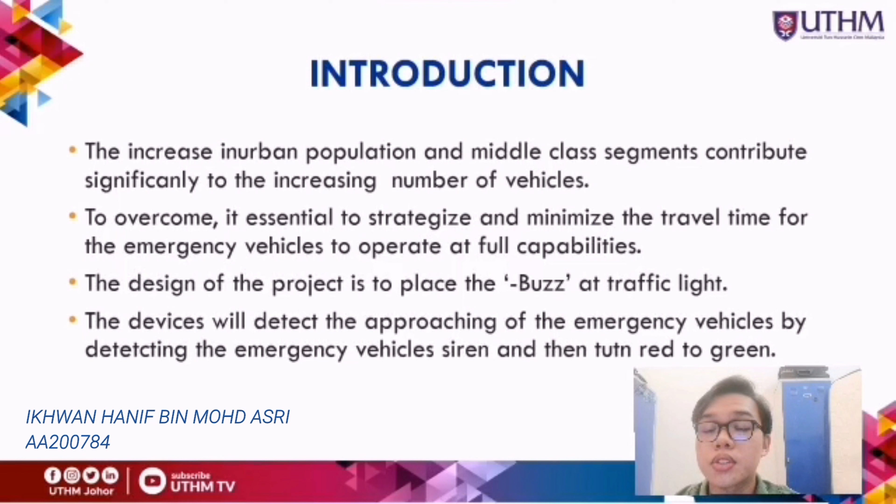Because of the increase in urban population, middle class segments contribute to the increasing number of vehicles. With the increasing number of vehicles, it is hard for emergency vehicles to get to the destination as early as possible.

So this project aims to overcome or reduce the travel time of emergency vehicles. The name of our project is called e-Buzz: Simulation Smart Sensing for Emergency Vehicle, and the objective of this device is to reduce the travel time.

The design of this e-Buzz will be placed at the mid-section pole of the traffic light. The device will detect the approaching emergency vehicle by detecting its siren, then it will change the red light to green light.

The objectives are: first, to design a device that efficiently detects the siren; second, to design a device that is easy to understand for road users; and finally, to develop a complete design of smart sensing for emergency vehicles using software.

The project scope is that we want to decide the design called e-Buzz: Simulation of Smart Sensing for Emergency Vehicle, as I mentioned in the introduction.

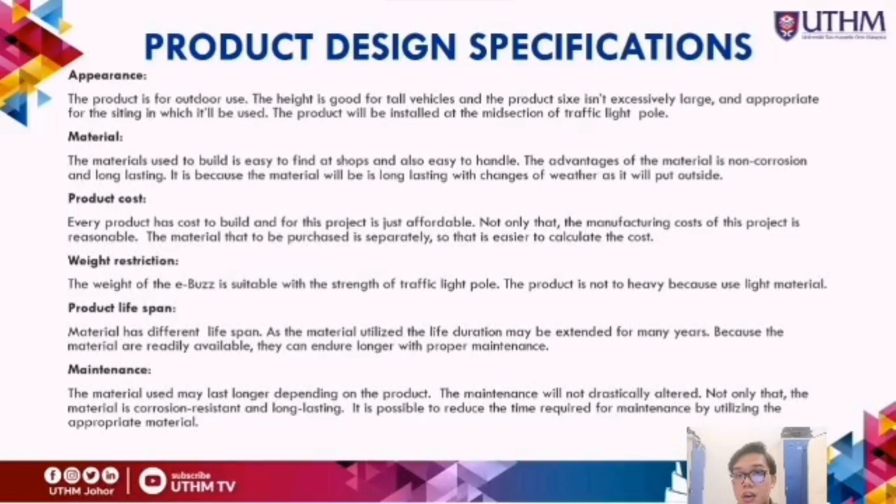Lastly, maintenance. The material used may last longer depending on the product, and the maintenance will not drastically alter. The material is corrosion-resistant and long-lasting, so it's possible to reduce the time required for maintenance by utilizing the appropriate material.

Now we go to product function. The e-Buzz will help reduce travel time for emergency vehicles. The siren of the emergency vehicle will be detected by a microphone sensor, then the sensor will transfer the frequency to the system, and the system will change the red light to a green light, allowing the emergency vehicle to easily get through.

Now we go to the design requirement and criteria. First, the requirement: it must be made out of material suitable to last long and non-corrosive. Second, product cost about RM 400. Third, the product can last for 15 years. Finally, it should be easy to maintain because the spare parts can be found easily at shops.

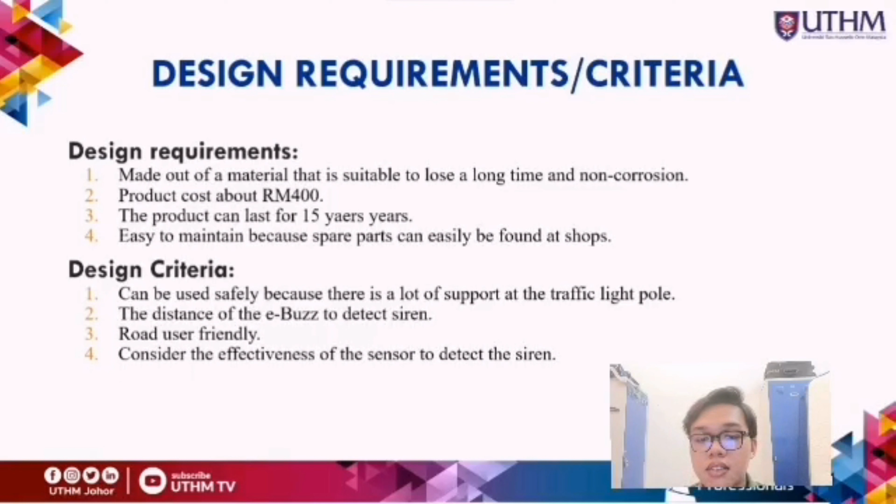Next, we go to the design criteria. It can be used safely because there is a lot of support at the traffic light pole. Second, the distance for the e-Buzz to detect the siren. Next is road user friendliness, and finally we consider the effectiveness of the sensor to detect the sirens.

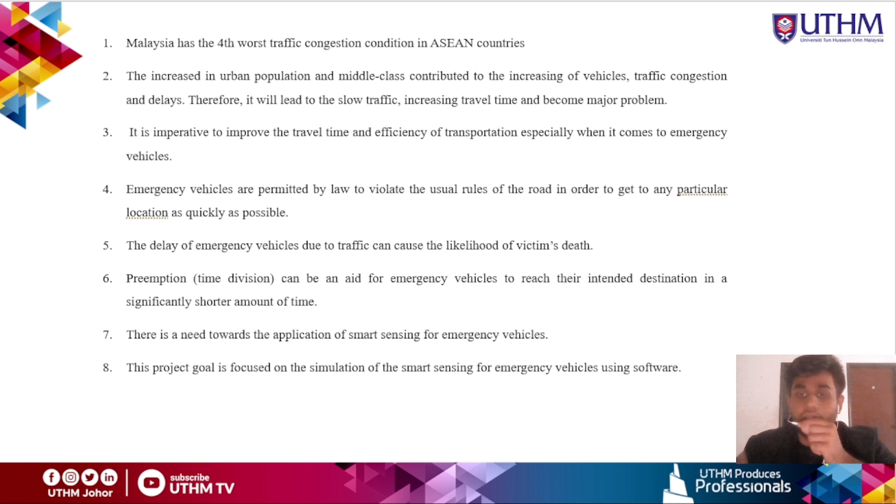This project's goal is focused on the simulation of smart sensing for emergency vehicles using software. Thus, the aim of the e-Buzz simulation of smart sensing for emergency vehicles is simply to ease the authorities responsible for reacting to emergencies, such as ambulance services, police, firefighters, and many others.

Every phase has its own subtopic to be discussed. Every phase is a vital step in product improvement, as it will assist us to visualize the steps in designing and help us perform this assignment with a terrific result.

The early level of this research phase method consists of layout and studies, knowing what we have, what we want, and the ways to get the required facts, from micro knowledge to apprehending the significance, using present information as a starting point. So by using analysis and synthesis methods and so on, we combine the vital influencing factors of the goods involved, so that we can manually carry out the layout in a focused manner. Thus, this is the research phase.

For the conceptual design stage, based on Cheng, from our reference, assessing the conceptual design stage means assessing a person's previous market needs and desires. This is what is called the conceptual design or conceptual layout stage. This takes the form of an ever-changing system after the above layout position is determined, from rough to fine, for example fuzzy to sharp, short to create layouts using specific procedures.

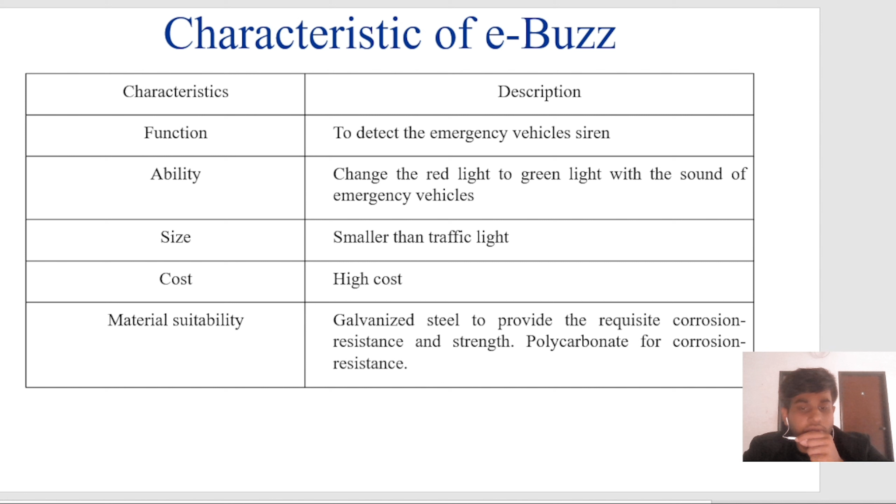Now I'll be explaining regarding chapter 4, which is the conceptual design. The design concept generation is the part where the idea generation occurs.

In this stage, we have to look at the problem from various aspects, and this will result in a concept that we may not have even come up with without some deep thinking. This is a crucial part of the product development process. Besides, we also discuss with each other as teammates to find out the suitable design and material.

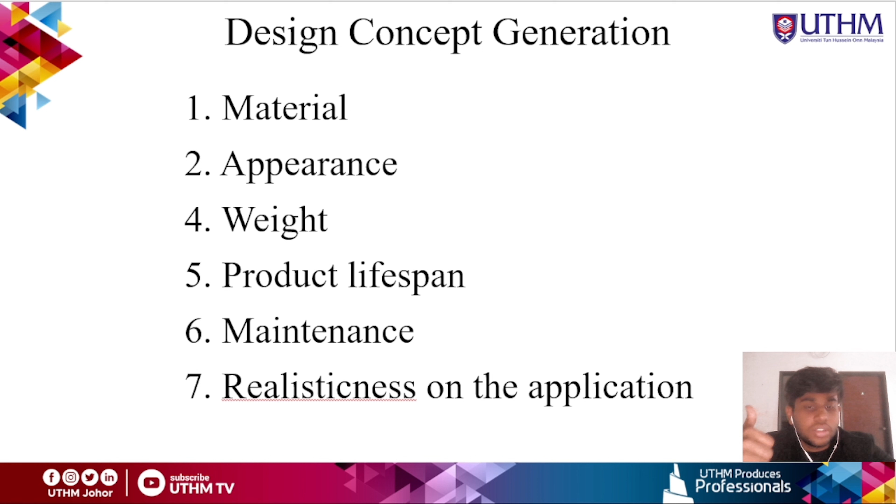From our discussion, we are able to identify several aspects: first, material; second, appearance; third, the weight; fourth, the product lifespan; fifth, the maintenance; sixth, the realisticness of the application.

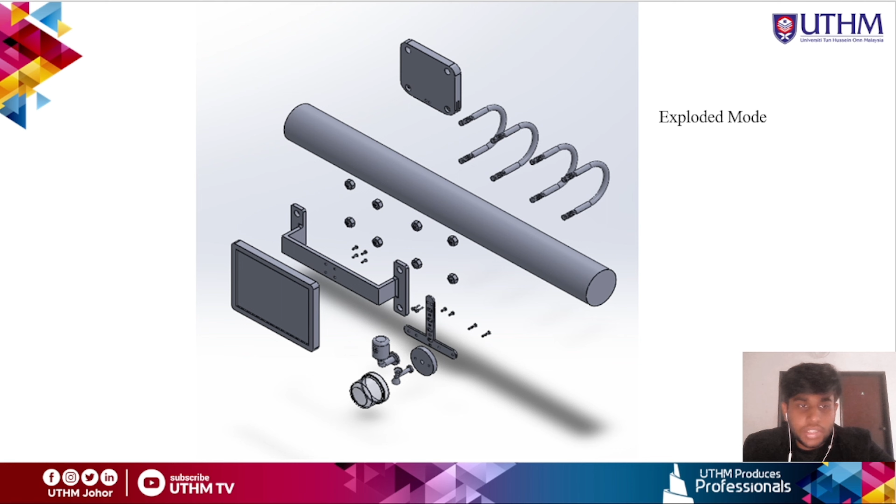This is the exploded view of the e-Buzz. In order to achieve all the requirements, the components of the e-Buzz have been produced, and each part serves different purposes. Each part has been determined by its function to create the prototype of the e-Buzz.

For the rotating part, it is to give the road user a notification or signal of an emergency. It has one quantity as well. As for the bracket, it is to connect and support the microphone sensor and the siren of the emergency part. It has one quantity as well.

As for the microphone sensor, which is the main component, it is to give a signal to the siren when it detects a trigger, basically triggering the whole device.

Then we have bolts of 20mm to connect components with another component. We have 4 bolts of 20mm size, and we have 6 bolts of 10mm size. This is to connect components with another part.

Then we have the mount, which is to complete the bracket with the mount hook, also one quantity. We can conclude that the conceptual design plays an important role in order to really brainstorm the design concept of the e-Buzz.

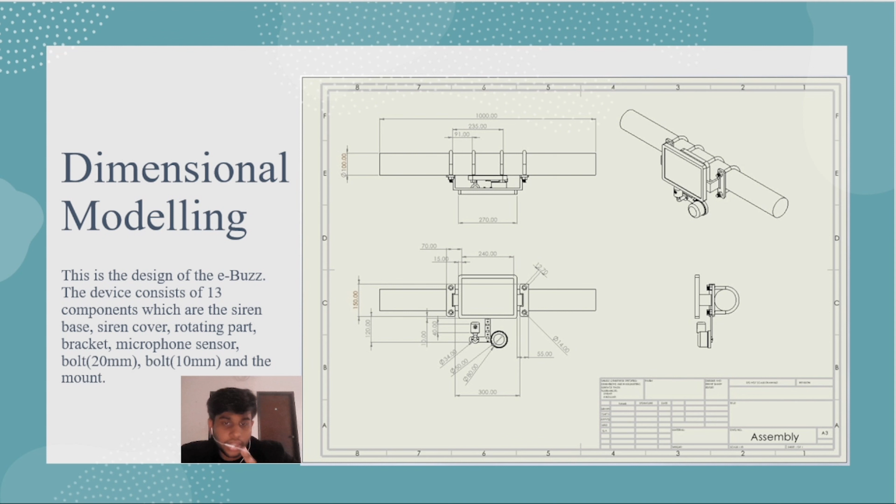For chapter 5, which is the embodiment design, this is the dimensional modeling of the e-Buzz. This design consists of 13 components: siren base, siren cover, rotating part, bracket, microphone sensor, bolt of 20mm and 10mm, and the mount. This is the whole dimension of the e-Buzz, detailed for each and every component and part, the sizing and the dimension.

Now for the calculation part, first we have to calculate the centroid. We use the formula: pi r square times 100 divided by pi r square. So pi, the radius is 100, pi times 100 square times 100 divided by pi times 100 square. Then we'll get...

100 for our centroid. Once we find our centroid, we have to calculate the moment of inertia. For the circle, we use the formula pi over 4 times 100 to the power of 4, plus pi over 4 times 200 squared times 100 squared. Then we plug in using a calculator, we'll get 392.7 times 10 to the power of 6 millimeter power 4.

Then we find the stress of compression by implementing the formula which is shown. We plug in 50 times 0.1 divided by the moment of inertia of circle, which is 392.7 times 10 to the power of 6. Then we'll get 1.27 times 10 to the power of negative 8 megapascal.

Then we find the stress for tensile. Using the same formula, we plug in 50 times 0.1 divided by 392.7 times 10 to the power of 6. Then we get 1.27 times 10 to the power of negative 8 megapascal.

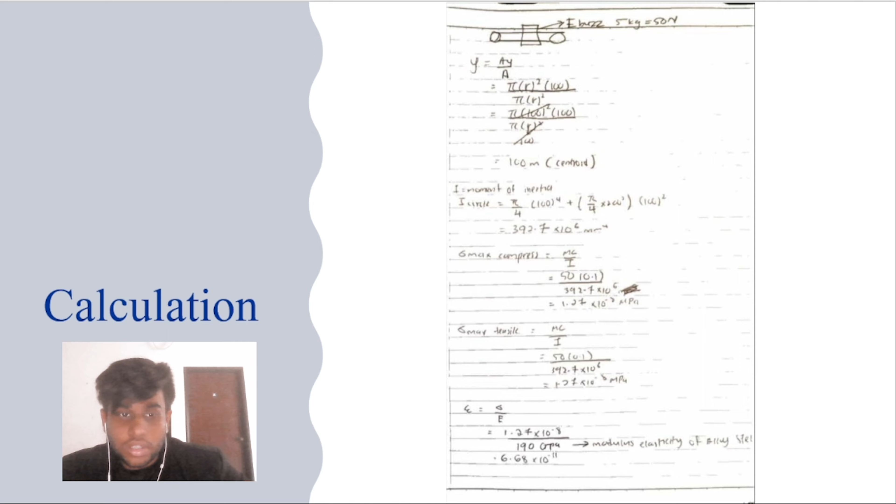Now, as for the material of the e-Buzz, all the selected materials will be utilized and have certain tasks and functions required to make a good product, so that the product can function well. To make the device operate well, we have to ensure the right choice of material so the objective of the project can be fulfilled. After discussion and research, we have determined the suitable material that qualifies to be used in our product in order for it to operate properly.

For the material we use high strength low alloy steel, because it maintains formability and weldability. High strength low alloy metals have excessive slip and corrosion resistance, but flow properties along with corrosion resistance and micro hardness can similarly be improved by manipulating the melt to form a premium dense grain layer on the floor.

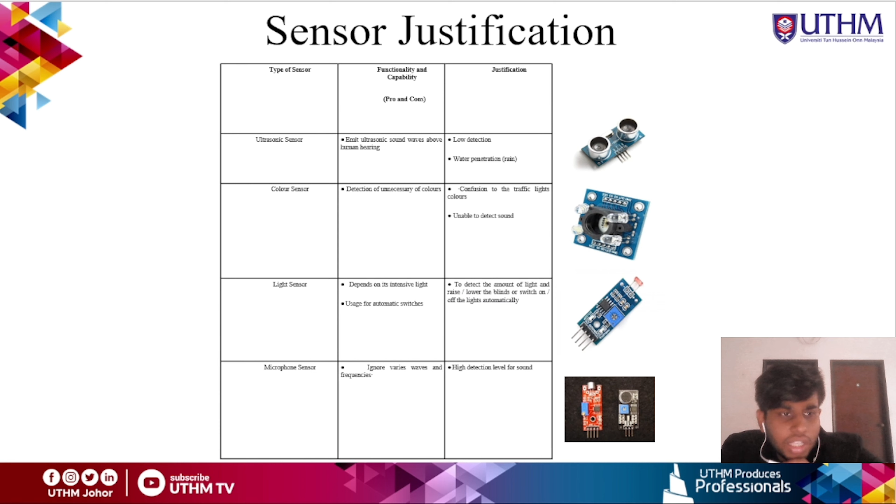Now for the light sensor, it depends on the intensiveness of light and uses automatic switches, detecting the amount of light to raise or lower blinds or switch lights on automatically. Now for the microphone sensor, it ignores various waves and frequencies. Why do we choose it? Because it has a high detection level for sound.

To put it short, the way the e-Buzz functions is divided into 2 ways: first, when the e-Buzz detects the approaching emergency vehicle with siren on, and second, without siren, as I have just explained. The process is simple.

All of the elements which I have mentioned are the critical differentiators between our goods and those presently on the market. Consider the product's likelihood of failure as well as the maximum performance that may be attained. We have worked really hard to ensure this product's design and production were error free, so no worries.

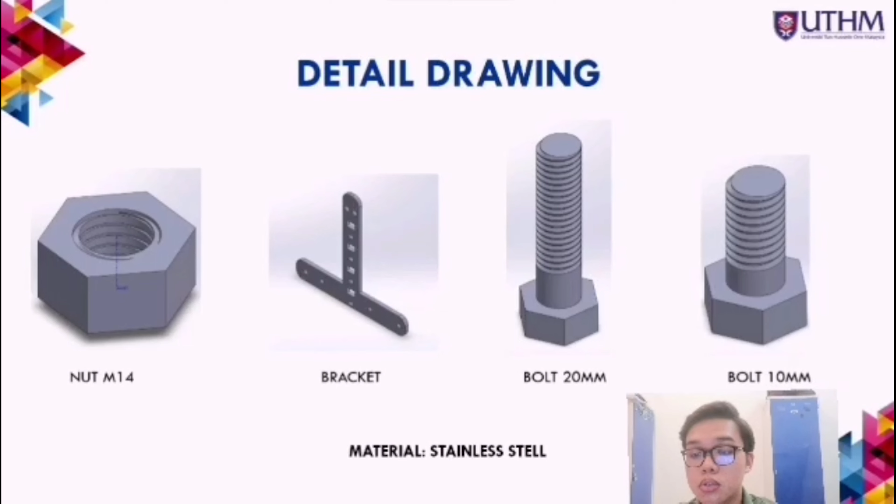Then for the detailed drawing, we will discuss the materials, made from stainless steel, such as nut M14, bracket, bolt 20mm, and bolt 10mm. This is because it is highly durable due to its corrosion resistance and durability.

Then we talk about the alloy steel used for parts such as the display screen mount, pole, and mount hook. This is because alloy steel has high tensile strength and easy compressibility.

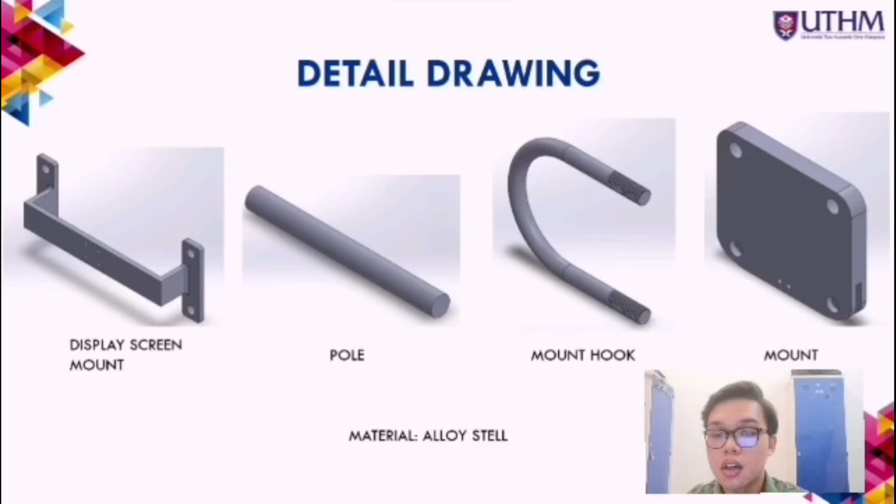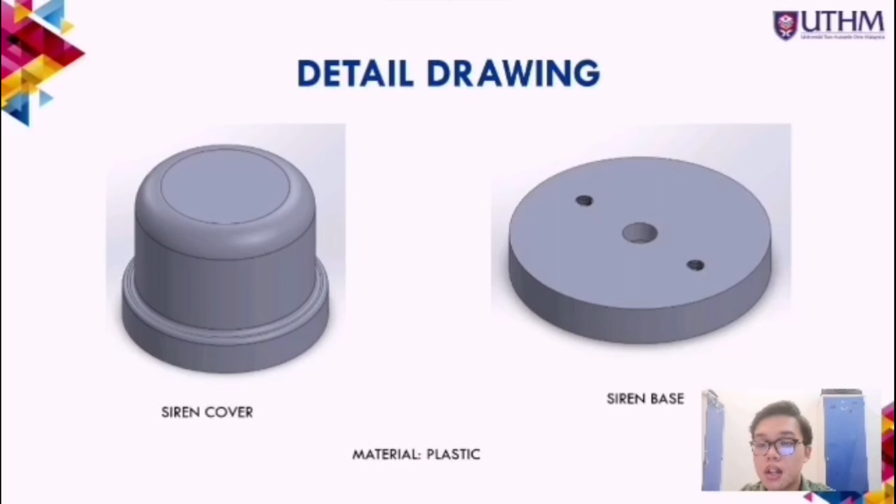Then we go to the siren cover and siren base, made from plastic. The reason we choose plastic is because it has tough resistance toward rusting and is UV stabilized to provide years of safety. For the display screen, the material we choose is liquid crystal display, known as LCD, because it has high energy efficiency and low power consumption.

Then for the rotating part, the material we choose is high strength low alloy steel. This is because it can maintain formability and weldability.

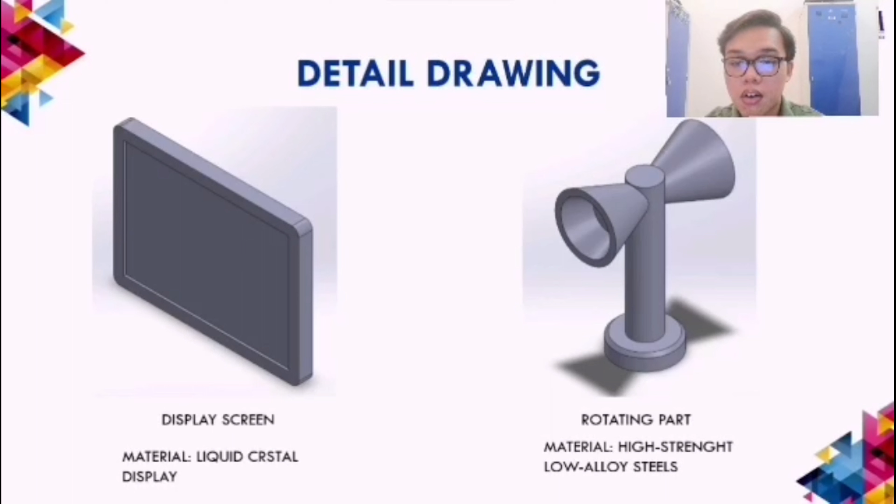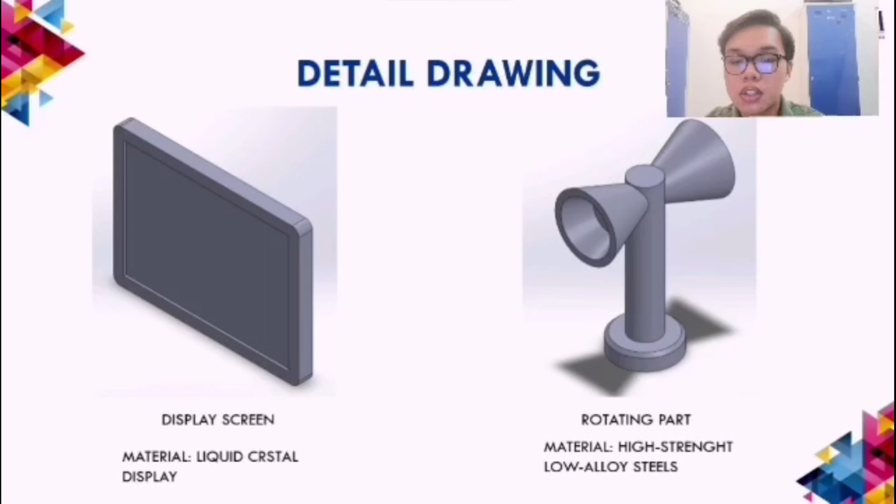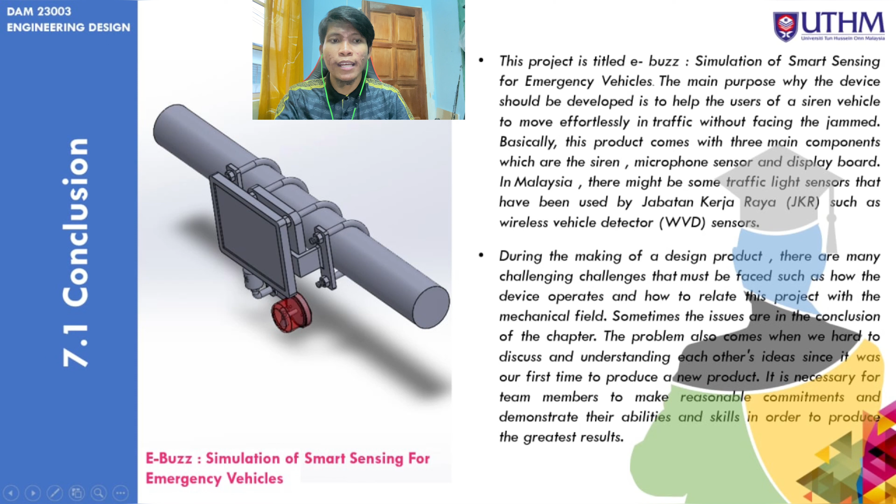Next, we can add more components or parts in order to make E-Buzz operate in a range of situations. Instead of adding more parts, we can also apply new technology or mechanical parts to make sure the microphone sensor is able to run in those situations, and also to prevent the device from being exposed to water that comes from rain. So the device will not be damaged by water if this new technology is applied.